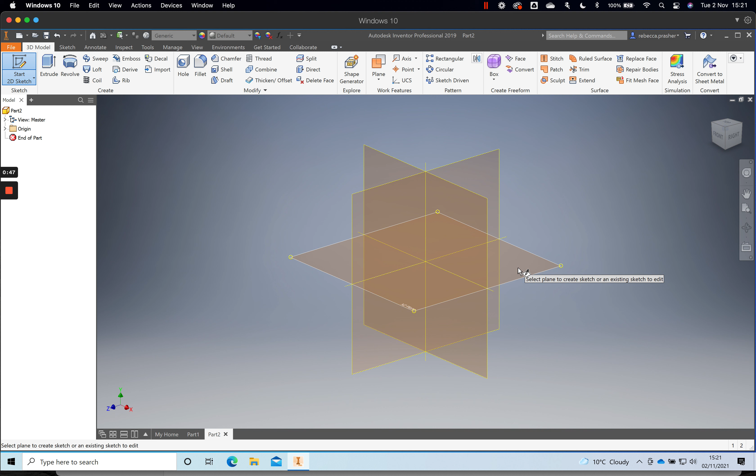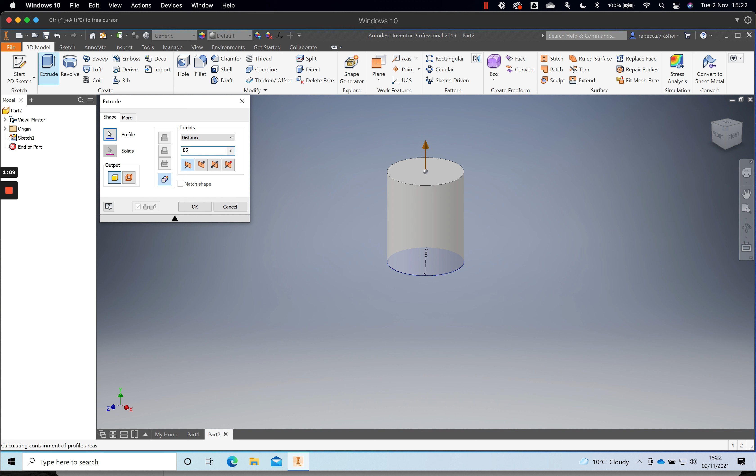So I'm going to start off with the very bottom, so I'm going to start a sketch, and this time click the XZ plane, and with the circle tool draw a circle at 8 millimeters, then press Finish Sketch. For the 8 millimeters, I'm going to click Extrude, extrude it up 85 millimeters, and press OK.

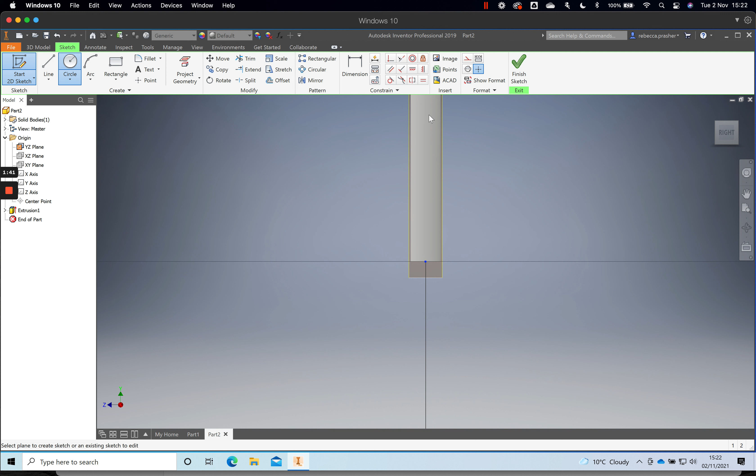Now, the bottom of the insert has a kind of diagonal line cutoff at the bottom, so we're going to look at doing this. I'm going to find a plane that runs down the middle, right click it, and turn on the visibility. I'm then going to start a sketch on that plane. You can press F7 on your keyboard to half the shape, and it'll make it a little bit easier to see the sizes.

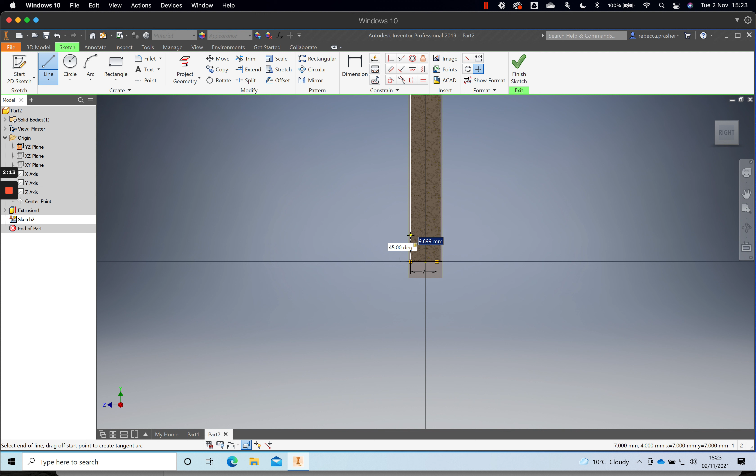So we can see that we have the line at 7, and then it goes up at a 45-degree angle. I'm going to go along the bottom to 7, press Enter, then press Tab to set it at 45 degrees. I'm going to click once I get to the yellow dot of the line, and then connect it back down to the 7. So I've gone along 7, up at 45 degrees until I've hit the line of my circle, then back down to join the 7.

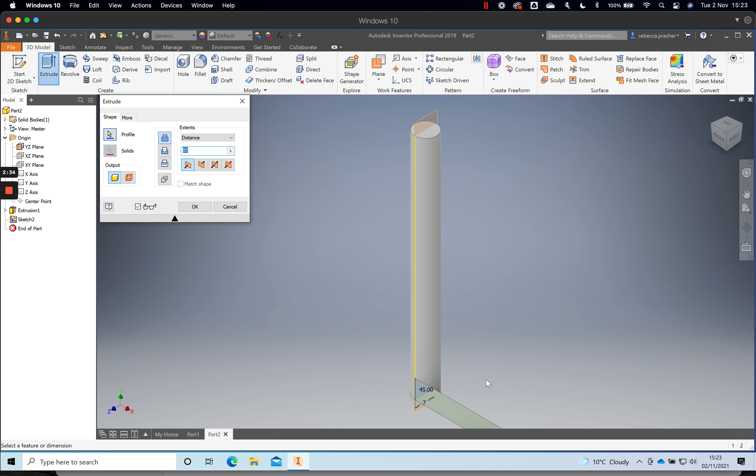I'm then going to finish the sketch and click Extrude. You can see that automatically it wants to make it 3D, so we're going to first of all change the distance, change the direction to direction symmetric, which is the third one along. Then we're going to go down to cut so that it cuts it out, and press OK. You can see here it's cut out the angle at the bottom.

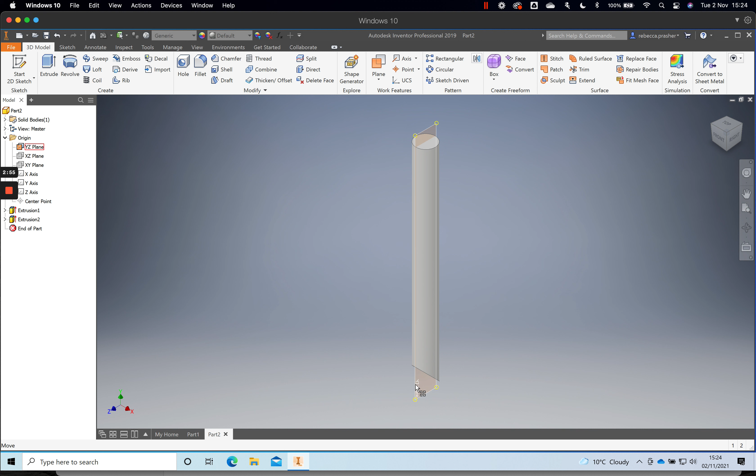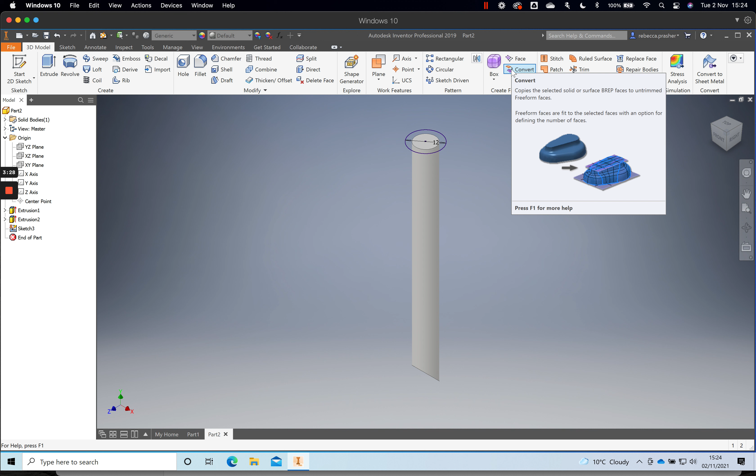Next, we're going to start building up each part of the insert. The next circle we can see on the dimensions is a circle of 12. So I'm going to start a sketch on the top, and using the circle tool, click at the center of the circle and make it 12, then finish the sketch. Then I'm going to extrude this up 25 and press Enter, so that I've got this top part here.

On top of this circle, I'm going to start a sketch on top again. This time I'm going to do a circle at 15 and finish the sketch, and we are going to extrude up 10.

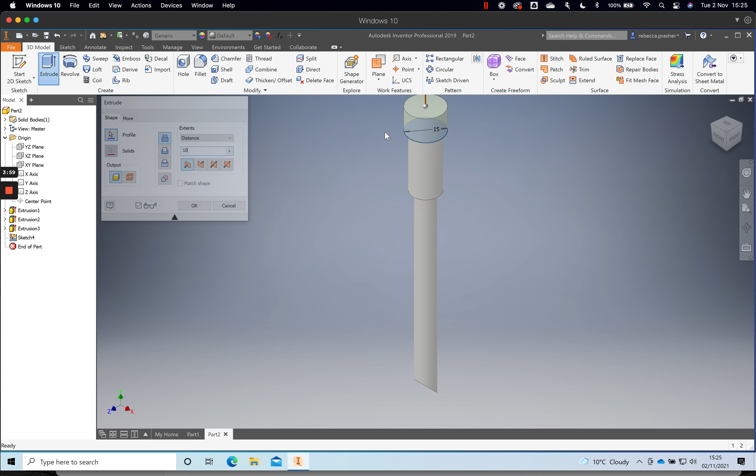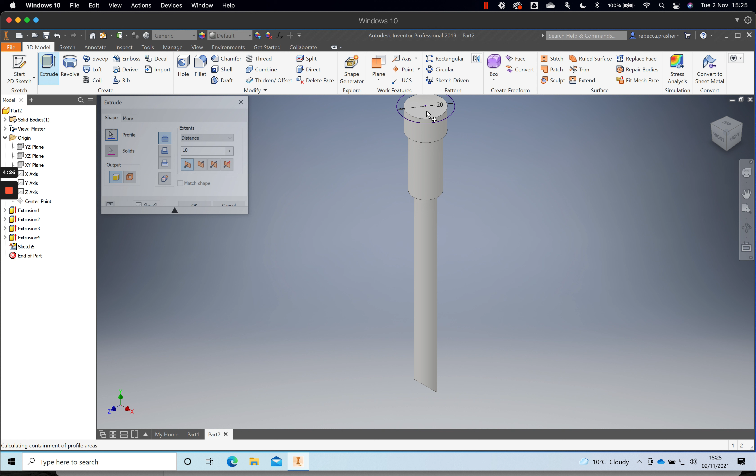On top of that one, again, I'm going to start a sketch at 20, make a circle at 20, and then finish sketch. For this one, we are going to go up 30, so extrude 30.

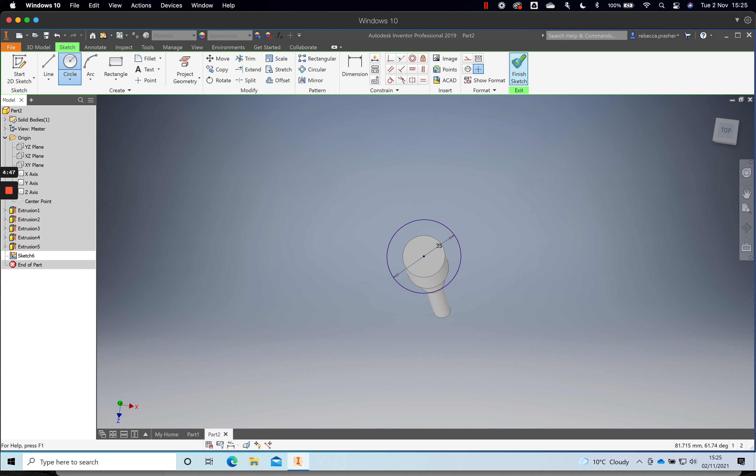On top of that circle, we're going to look at the biggest circle of all, 35. So start a sketch on the top and draw a circle at 35, and this one is going to be extruded up 15.

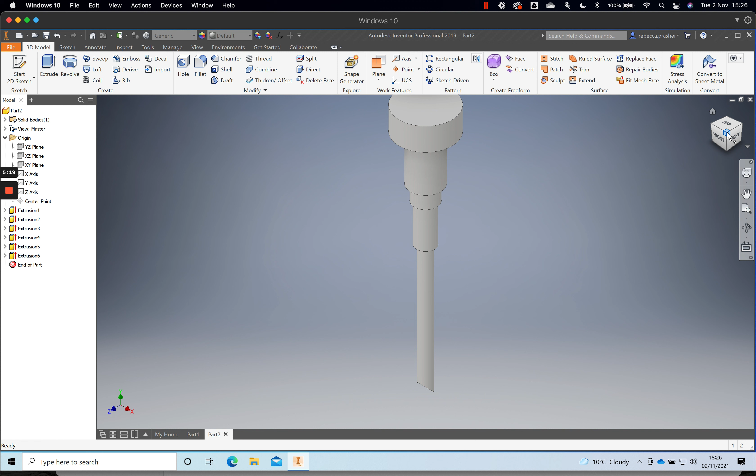And then the last one of the circles is the top circle. So not the very top, the one that's extrude subtracted, but the one below it, which is 25. So again, I'm going to start a sketch and do a circle at 25, finish the sketch, and the circle at 25 is going to go up 7. So extrude that up 7.

Now I'm going to look at shelling the object. You can see that the object has been shelled to 1 millimeter. So I'm going to click shell, make sure it's 1 millimeter, then click the very bottom to shell it through the bottom, and press OK.

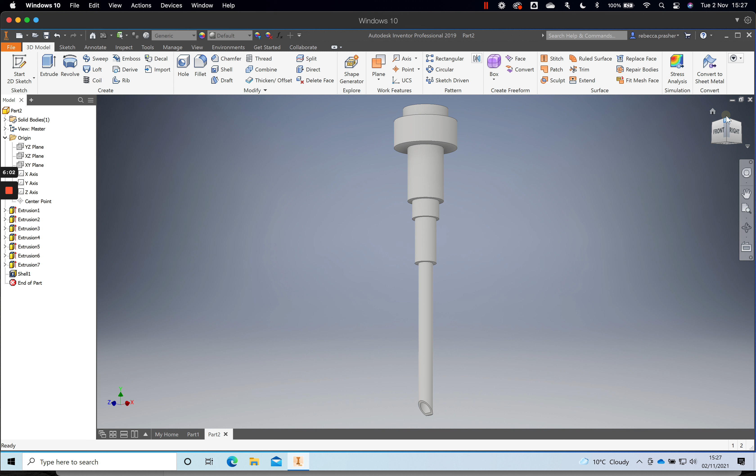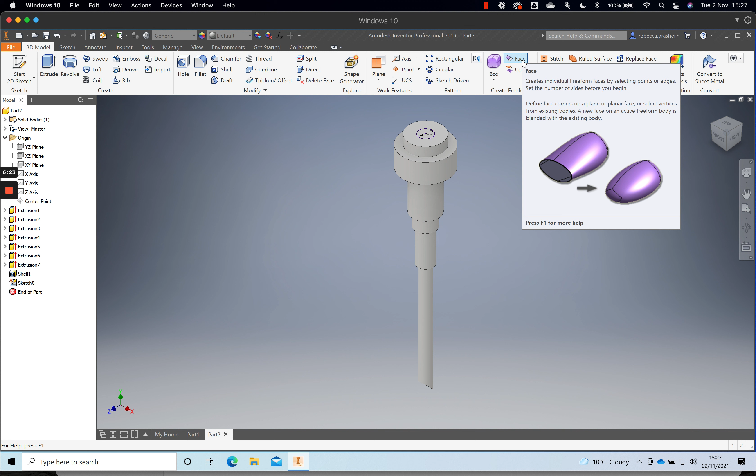In order for the pump part to fit into the insert, we need to create a circle for it. So I'm going to start a circle at the top again, this time making it 10. Then we're going to extrude it, but this time extrude subtract it down 5. I'm going to click extrude, change it to 5, but this time change it to direction 2 and make sure it's set to cut.

And that gives us our insert. We can then go up to File, Save As, and save it into our OneDrive.